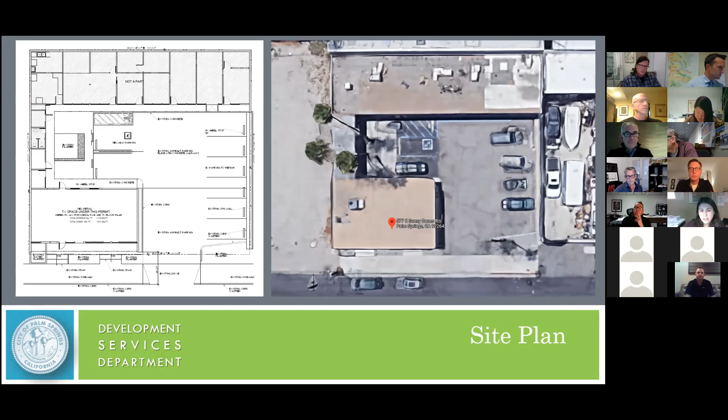There we go. This is a site plan located at 577 East Sunny Dunes Road. The project site consists of 2 main buildings attached by 2 existing restrooms and a storage area on the left. You can see the screen now, right? Yes. Okay, so the image on the right is a Google aerial of the site as it exists currently. You've got a building in the back, and it's connected to the building in the front by some storage on the left. There's a building, a very small building, on the left.

This gives you a better idea of the floor plan. The proposed cannabis dispensary will only occupy the front building, formerly known as Bones and Scones. The retail aspect is approximately 800 square feet. The office is 92 square feet and the storage facility is 123 square feet, with an additional storage area and restroom located outside of the main building.

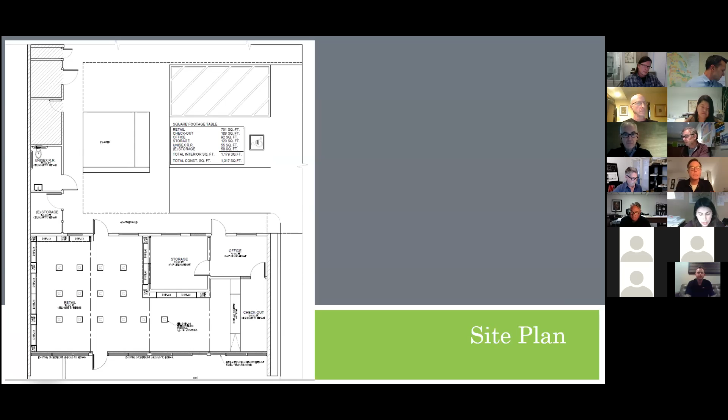The front of the building faces East Sunny Dunes Road. The applicant is proposing to repaint both the buildings in the front and the rear a light beige color. The existing landscaping areas that are filled with sand and rock and dead vegetation currently will be replaced with a nice desert landscape. The applicant is also planning to plant 3 Palo Verde trees in the parking lot along the western property line, which will provide shade to patrons of the development.

The existing mosaic panels on the west elevation of the building will be cleaned and restored. All mismatched doors, screens, and windows will be replaced, and all exterior wall-mounted AC units will be removed and replaced with original clerestory glass. All the debris in the parking lot will also be cleaned as well.

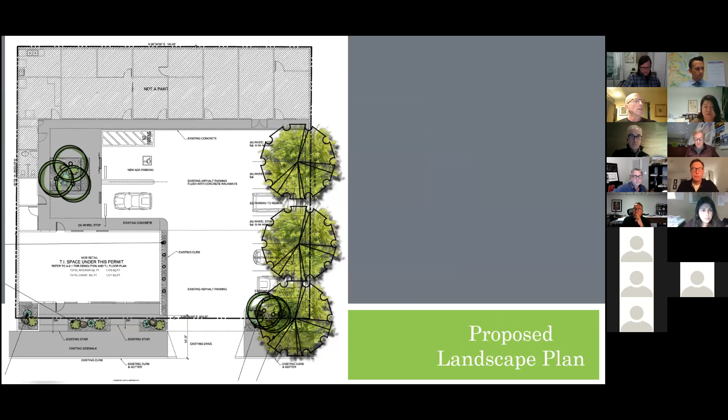So the cans that exist, are they staying or are you replacing them? The ones in the overhang, yes, those stay. They were part of the original design. We're going to restore them and get them to work again.

Okay, that's all I had. Thank you.

Jim, I have a question. In the front along Sunny Dunes, will ADA require a ramp so that you can get from those front doors to the sidewalk without using the stairs?

They did not require that, and it's not a real feasible thing. The building's only 25 feet wide, and that ramp would be, with the 5 feet of landing at both ends, at least 30 feet long, so it'd be longer than the building. The ramp would have to start in the driveway area.

So we are providing access from the ADA space in the back to the door, and that's all level. Technically, to get access from a public way, we would have to have access along the driveway, along the west end of the building and around the corner and into the door. That's the only way to get in and out of the building from an ADA standpoint.

That ramp would also be out in the right of way. The property line is at the edge of the step there.

I'm not saying that I want it, but I do know that on another dispensary we just reviewed on North Palm Canyon, after the fact, they had to come in and install a ramp to get from the sidewalk to the entry door of this dispensary. That's the one in the building where Mark used to be.

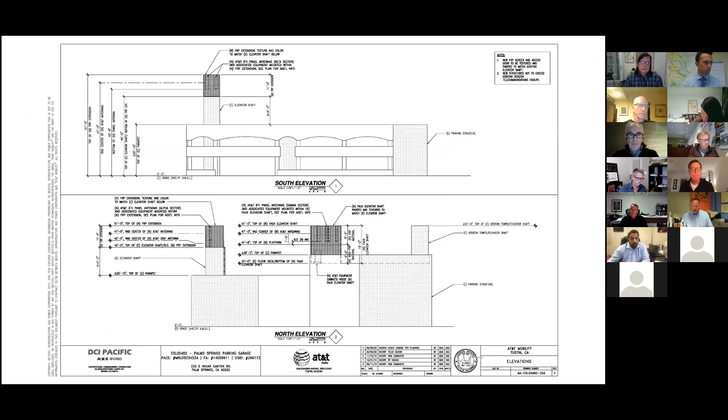Are the tops of these new extensions open to the elements, or do they have an enclosure on them? No, they're closed and fully enclosed, they have a roof. So we don't see any additional scuppers and drains for that, the existing portions have them.

You mean like a downspout for rain? Yes. They would have to describe that. I'm not sure. Okay.

Glenn, do you know with the existing elevator shafts, is there a parapet and the roof is lower than that, or is the roof right at the top, at 14 feet 2? My understanding is there's no parapet, that the roof is the top of the shaft, and it's a hydraulic elevator inside.

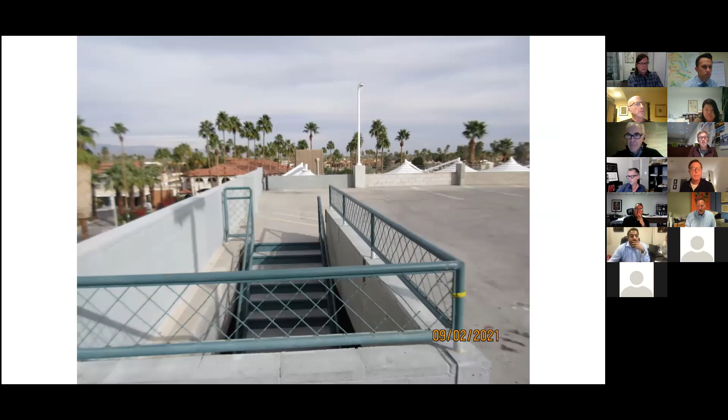One more question. Does the existing Verizon tower have a permanent ladder attached to the exterior? Let's see, I don't seem to, no, you access it from a door at the bottom of the shaft. I don't have a picture of it. Is that what you're asking, how to get into it?

Right, I see a proposed permanent ladder attached to the AT&T ones. Does Verizon have a permanent one? No, Verizon, you go inside. Okay, let me see here. Yeah, there's a ladder here on this side. Okay, thank you.

Mr. Chairman, I have a question of staff. John, yes. Glenn, you did a good job on the math, but I still got kind of lost on some of it. So staff recommendation is to 46 feet, is that correct? Yes, if we can get it lower. Most cell towers we have approved are in the 45 to 48 foot range.

Okay, and what we're seeing, for instance the northeast tower, you've got one really good shot of it. I'm looking at 51 feet, correct? Yes, that's what they're proposing. Okay, all right, thank you.

But the question is, is that still at 46 disproportionate to the rest of the garage? Oh, I think we will have much to say about that. Okay, all right, stand by. Okay, any other questions of staff?

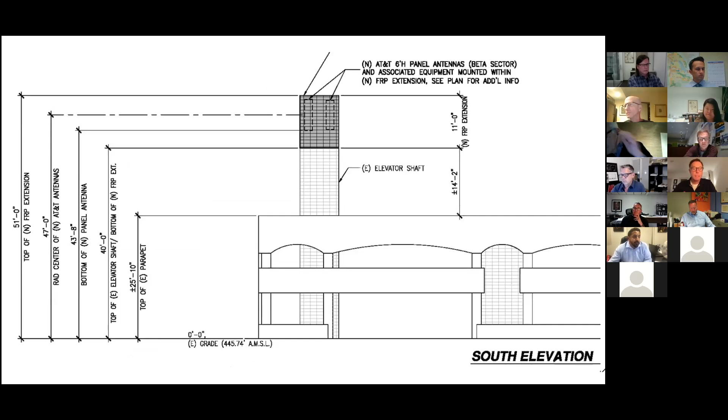To the south, we have a large shopping mall with tenants such as Rite Aid, Chase Bank, and various banks. To the west is an area we're really trying to focus on, the Palm Springs Tennis Club. I know the heights are of concern, and that's simply because of the topography in this area. We're trying to service an area that is kind of secluded around a mountainous range to the west.

The building directly across the street to the east is a 3-story apartment or motel building, and that is really the issue causing problems with our line of sight for antenna coverage, limiting the coverage we're trying to seek beyond that building. Throughout this downtown area, there are various palm trees that line each street in every direction, which also hinders projecting our signal beyond that distance.

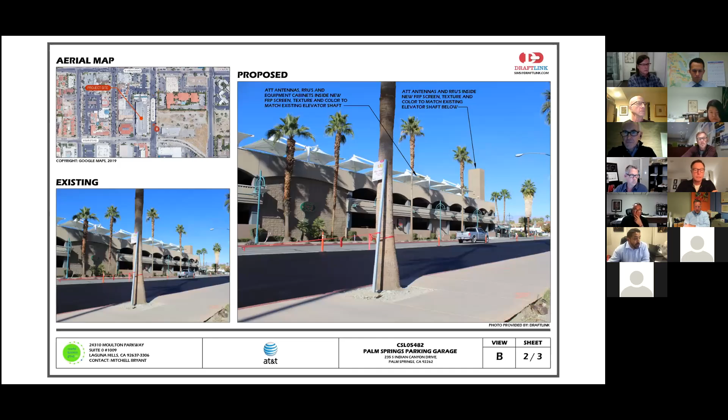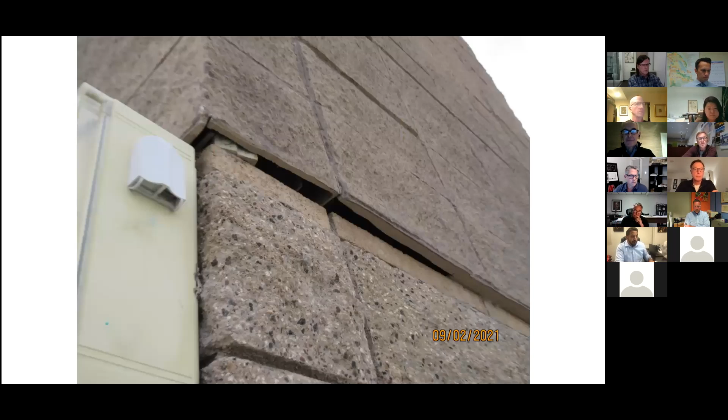This project has been ongoing for a little over a year now, and our initial submittal consisted of a 53-foot FRP extension. Upon our initial planning comments, we were asked to drop it down to 51 feet to match the existing Verizon facility that's at the same location.

So we are seeking your approval to move forward with our project to match what Verizon has successfully completed at this location, and their data does show that the coverage they were seeking has been achieved. So we are looking to do the same and mimic their previously approved architectural schematics, with a little variation based off the areas left for us to use on that parking structure.

This is after vetting out various sites. This was known to be the best location, away from residential areas, that would provide the best outcome.

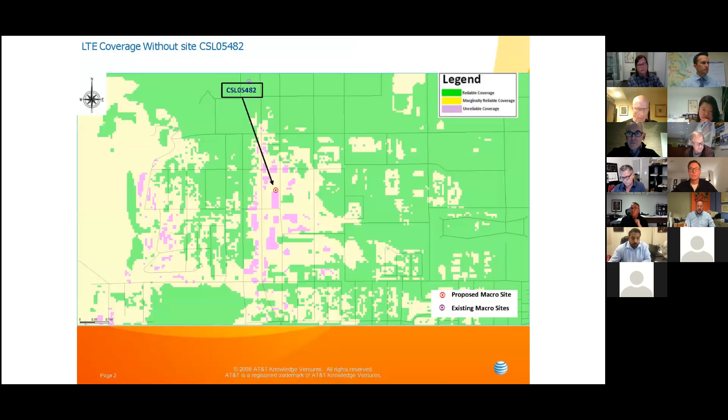The coverage is needed - I'm going to ask some layperson questions, so bear with me. The deficiency is expressed in the form of dropped phone calls in this area, slow data rates, and complaints to the carriers, is that correct? Because one of my first responses was - and this may be totally unique, maybe I have better coverage or something - but I have never lost a call anywhere in that area we're looking at. It's just kind of interesting.

Can you go back to your first comment - was that apparently one of the real causations of this is an apartment building across the street, or the multi-story hotel? It's the Best Western Plus, Las Brisas. Okay, 3-story. All right, huh, okay.

If you put something on that roof - I'm just asking this for general understanding purposes - would that fix everything? Well, the aesthetics we would have to discuss with our engineering team, but the nature and style of that roof would require a larger structure to conceal our antennas because of the various slopes on that building. And I believe my predecessor did approach Best Western and they were not interested.

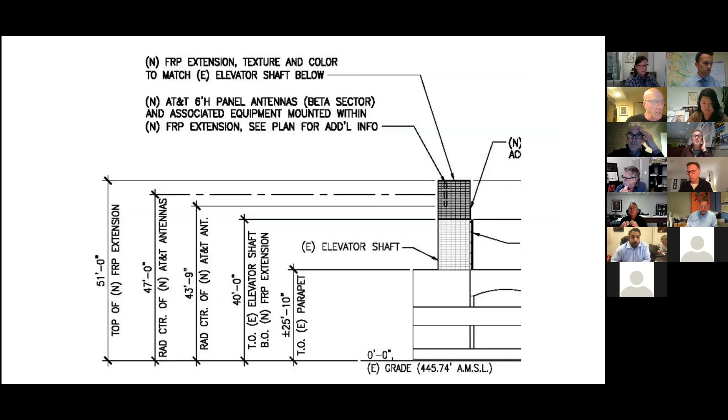Is that right? Correct. And do you know, it looks like there's some sort of brackets that these antennas are mounted on. Do you know about where they are in terms of the heights on the antennas? Are they at the bottom, middle, top? Are there multiple brackets? Multiple. It's top, bottom, and then there's cross bracing.

That's all going to be determined based off of our engineering calculations once we get to the building and safety submittal stage. But typically it does involve top and bottom for stability and for the new structural code that's governing the wind load in this area. It would require the additional bracing.

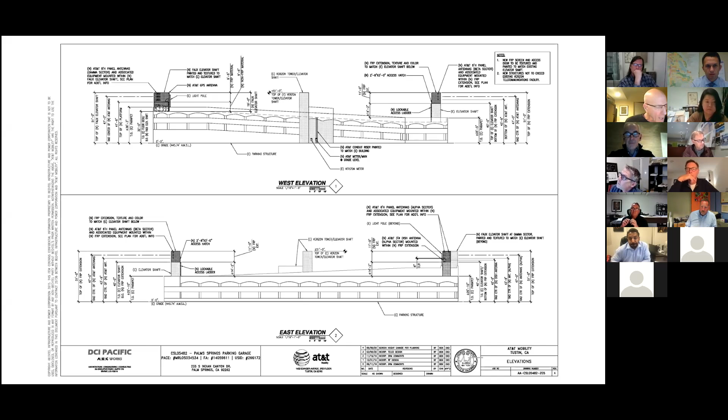Okay. And with the equipment room, you've got a 9'6" ceiling height, and it looks like at least part of it is an open grate. Am I reading this correctly? Typically the equipment platforms for this type of a build is an open grate, just to keep the airflow moving through there as well, to not enclose it.

And is there some reason you need 9'6" height in the equipment area? For ventilation, the cubic feet, how it's measured, but also the cabinets, the cabinet heights would limit that open space, and for somebody to safely crawl in there and access the cabinets and walk around that general area.

Okay. Let me just see. And also to mention, I think that for the installation of the equipment as well, anything lower than that would be hard to slide in the equipment during maintenance phases and the installation process of it.

But aren't you bringing the equipment in through the door, or are you craning it in from the top? It would be a combination. It may require crane. I'd have to consult our engineers, but based off of the way that the cabinets are constructed, usually when they're roof mounted equipment, they do hoist them up.

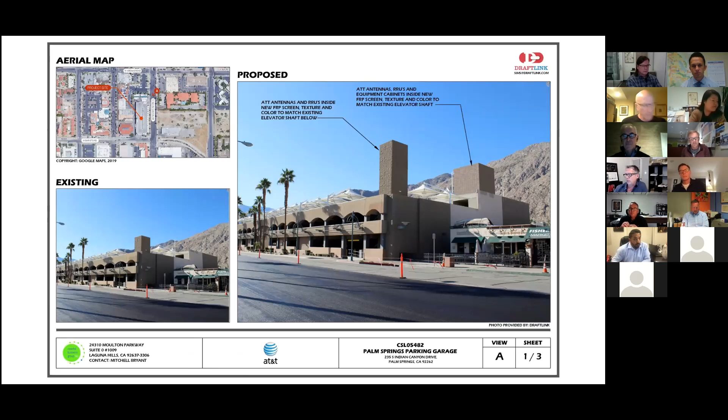Is, John, yeah, is there some area in the center of the building where these could be located? Do they have to be on the corner of the building? Well, our design intent was to not reduce the number of parking stalls and in essence reinvent the project.

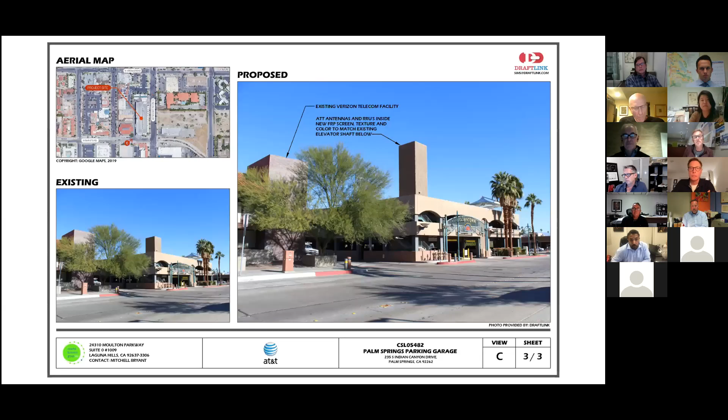So we're looking to keep the aesthetics as much as possible to the existing building, and just to add on to it. But yeah, that would be the least intrusive method for this parking structure, and it would be a little bit more of an engineering feat to place something right in the center, because there is an opening on the way that parking structure works, and the post tension nature of that building would make it a little more difficult to work with, and could cause potential issues with the structural capabilities of that current structure.

I have a question. Sure, Tom. The type of equipment that's being used here, is it similar to what you might see on like a monopalm or some of the other installations? Or is there something different about this, other than the enclosure it's being placed in?

We use the same equipment for various site types. In essence, it's supposed to be the same equipment that you would find on a traditional monopole. Usually monopines or monopalms are restrictive as far as how much equipment can be placed on there because of the concealment issues. But this proposal was based off of concealing the site completely to not make the antennas noticeable and stand out.

And is it more or less than what you might find on a traditional setup at each of the locations? This current setup is the same as what you would find on a monopalm. The same amount of antennas and equipment. Okay, great. Thank you.

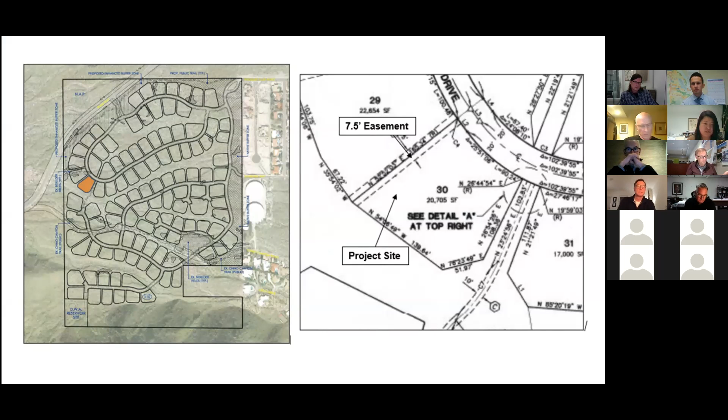Do we have a staff report? Yes, good evening. As introduced, the project you are about to review tonight is a proposed new single-family residence. The project site is located within the Desert Palisades specific plan area, shown on the screen indicated with this orange color, located in the southwest portion of the specific plan area.

The project site is a hillside, and its topography slopes down from its southwest corner towards the northeast corner of the lot. These are the photographic images that applicants submitted, taken from the project site.

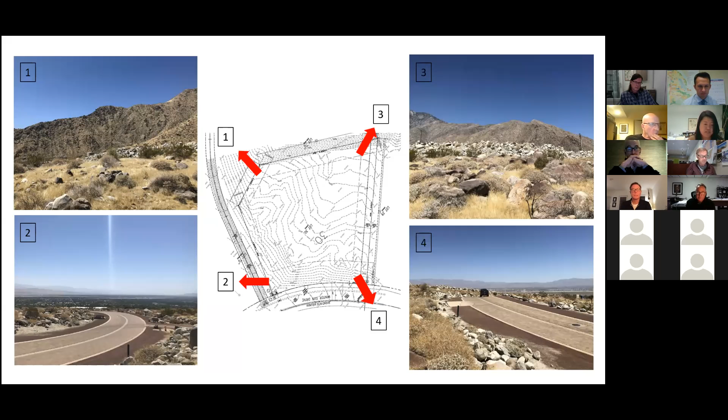As introduced, it's a new single-family residence in the Desert Palisades specific plan area. The size of the residence is 4,276 square feet, and the lot size is 20,705 square feet. The proposed residence is a single story with a maximum building height of 22.2 feet.

Because the site is located within the specific plan area, this project was reviewed in accordance with the specific plan development standards, as well as architectural and landscape design guidelines, in addition to the city's other zoning ordinance regulations, such as hillside developments, architectural review, and environmentally sensitive area specific plan zone regulations.

This is a proposed site plan. As shown, the site is accessible from the driveway, located on Winter Sun Drive, which extends along the west property line towards the rear. The building is L-shaped in orientation, and the proposed residence will accommodate a detached pool cabana as well as an infinity edge pool.

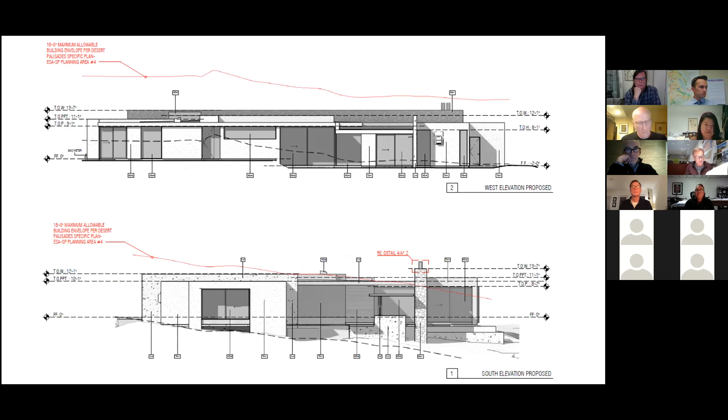These are the elevations of the proposed residence. The applicant provided the red line, an 18-foot line, to show the maximum allowable building height for this particular property. As you see on the top elevation, part of the building will project slightly above the maximum allowable building envelope. These are other elevations, west and south, where again part of the structure projects above the 18-foot allowable building envelope.

The proposed project includes a new landscape, and the proposed plant palette includes acacia, Mexican and Texas ebony, palms, and cacti. The project proposes dispersed plant placement to retain the natural appearance of the site, and the plant palette also includes water efficient landscape planting materials. However, a majority of the materials proposed for this project are not native plant materials listed in the specific plan guidelines.

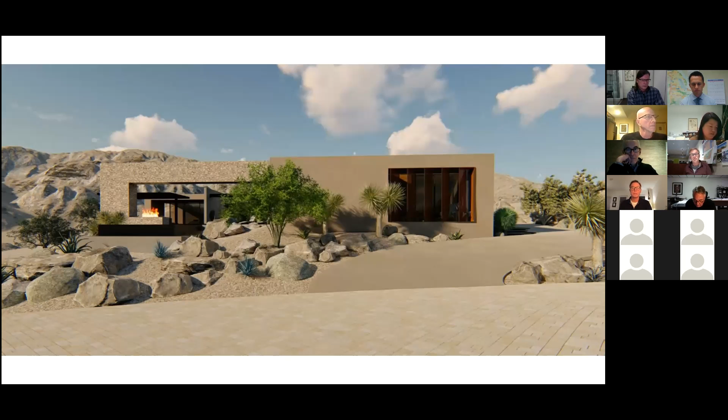This is a primary elevation of the residence, which faces north. As you can see here, the proposed design exhibits a rectangular geometry with very strong horizontal massing.

And the project proposes a mix of vertical and horizontal elements to create an interesting natural rhythm within the building, to differentiate the volumes. As you see here, the applicant is proposing to use unique materials to accentuate the building elevations. And these are the views of the outdoor area.

The project proposes a wooden deck which extends from the primary residence to the detached pool cabana. They're proposing to utilize black onyx coping tiles for the pool, and to use wood as a ceiling material for material consistency and for accentuation of the building.

And these are the images of the rear of the property, the garage elevation, as well as the view that's taken from the side, actually the east side, and the roof overhang, just to show what they're proposing to do.

As you see in the staff report, the applicant provided a material board, and they're proposing to utilize different types of materials for this project. The proposed materials include natural stone, smooth stucco, walnut veneer, board formed concrete, and Corten steel.

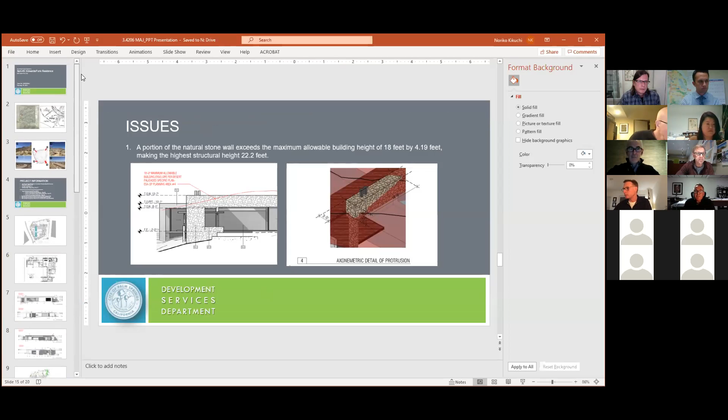Noriko, the limitation of 150 square feet for the pool cabana, is that something in the city regulations, or in the plan district or HOA regulations? This language is actually noted in the development standards as well as the design guidelines of the Desert Palisades specific plan. So you do not find this requirement in the general zoning code section, but it's coming from the specific plan.

And is there a method to approve a larger footprint for the cabana? Based on my research, no, not to increase the area or anything. Thank you.

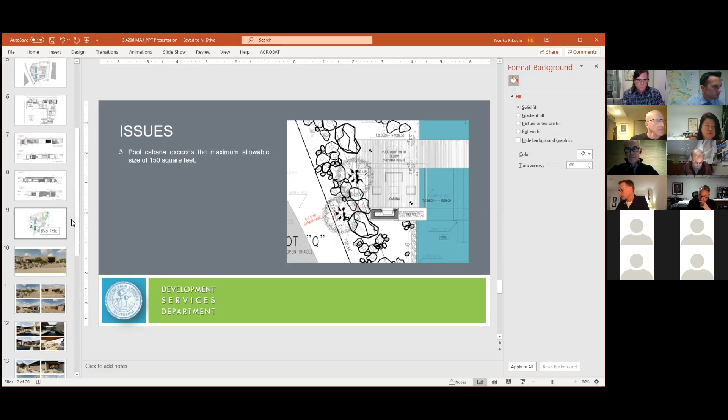Does this go through the development's HOA review? Yes, according to the applicant, the project has been reviewed by the HOA and it has been approved. The applicant is here with us tonight, and he can provide more detailed information. Okay, thank you.

Robert, did I hear you wanting to ask a question? Yeah, I do. So Noriko, when they calculate the size of the cabana, is it the roof area, not the floor area? Correct, it's the covered area. Okay.

And then the other question I have for you, the area where the encroachment of the mechanical room, mechanical space goes into, beyond the property line, that is just open space. There's not another single family property right there. There's some sort of easement. I know there's a sort of a one-lane road that goes up along one side, but then there's an open space easement or something behind that. Is that right?

So yes, this particular lot backs up onto an open space, and the area where the part of the building projects, that's actually facing a trail. So it's not really facing another property or anything in the area. And I think the easement you are referring to is actually on the opposite side, in the west side yard area.

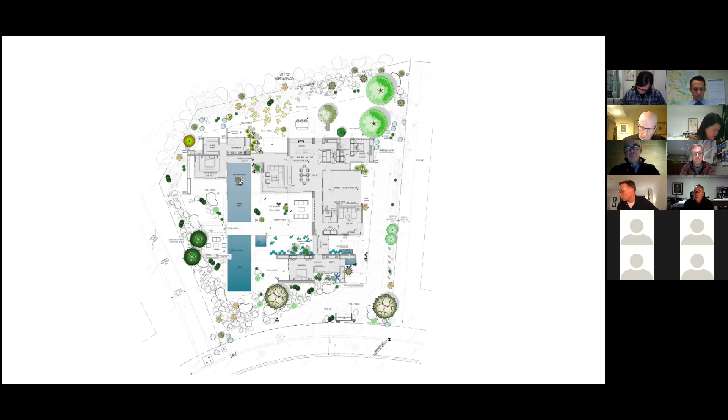Okay, thank you. Any other questions of staff? Okay, would the applicant like to give us a presentation? Give us your name please, and you have 10 minutes.

Hi, I'm Jordan from Studio AR&D Architects. Thanks, Noriko, for presenting the project. We'd like to explain to you what the initial concept for this project was. Due to the nature of the site, with so many beautiful views and undulating topography, the initial concept was to have multiple nodes and pods of the house spread across the site with glass bridges connecting the spaces. As the concept evolved, these nodes ended up getting closer to each other, but we still have defined wings through the site.

One of which became the Cabana, and this stone blade wall connects and ties the structure through the site. So that was the initial concept. There are a few key defining features as well. The biggest one we would consider is the natural stone blade wall that runs from north to south of the project, running through the house. It serves multiple functions, such as built-in vanities in this wall. We've got a water feature at the front entry penetrating this wall. It also serves as a header that goes above the pool, creating an interior space for this yard without framing the view, and also providing a little bit of shelter and shade for the Cabana. It also functions as a chimney at the Cabana for an outdoor fireplace.

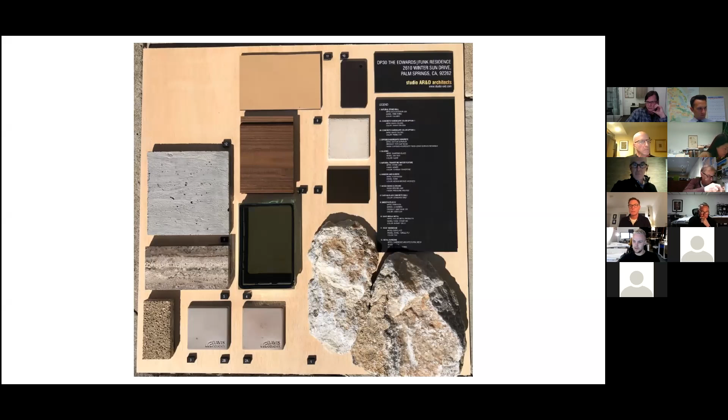So at the Cabana, that blade wall there, where we're exceeding the maximum building height, that's a chimney. I don't know, Noriko, if you could show this view here. Due to the nature of the site with the topography, it was really hard to get this blade wall to conform underneath the 18-foot high maximum allowable envelope throughout the whole site, because the topography in this corner of the site drops about 7 feet. So it was hard for us to make this part of the wall conform, and that is why we've added this diagram showing what part of the wall is penetrating this. Again, that corner is purely an architectural projection and a chimney.

Moving on to the architectural projection at the master bedroom. This area here, we consider it like a bookend to the structure. It defines and grounds the master bedroom, and it provides shade from the western sun to the master bedroom, and it also provides a little bit of privacy from pedestrians on the hiking trail walking down. It blocks their view into the master bedroom a little bit, and we just think it ties the structure together.

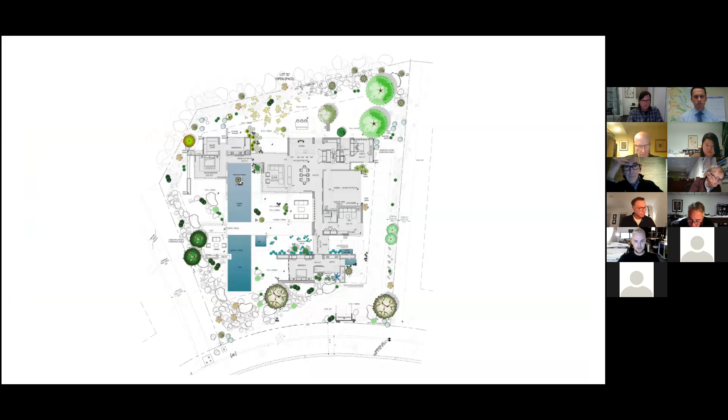That's about it. The pool is probably one of the other big design elements of this. It runs east-west through the yard, and it also, as well as the blade wall - if you could show the interior renderings of the yard. Yeah, these ones here.

Yeah, that's about it from me.

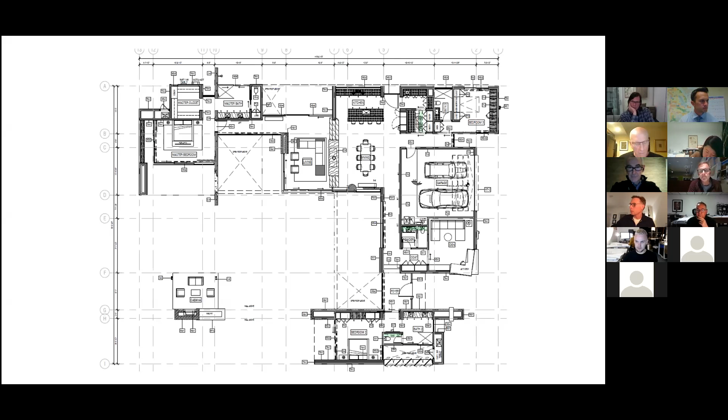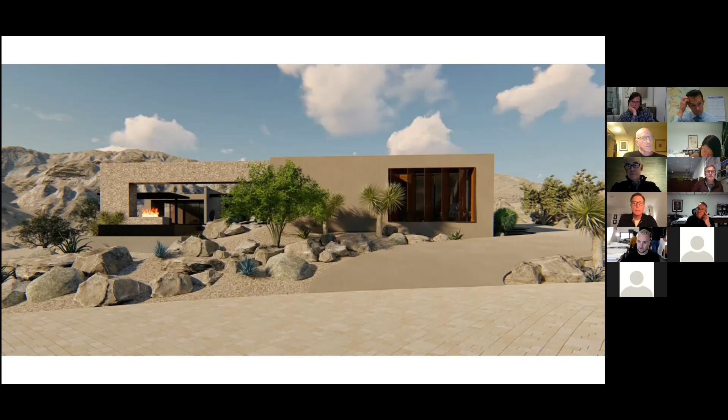Okay, and at the bottom of the drawing here at bath number 2, in that courtyard between the bath and the street, it looks like there are operable louvered doors, and I couldn't see on the elevations what the material is. I'm also wondering how those louvers operate. Yeah, those are going to be a woven corten steel louver, which are in the renderings—Norika, could you show those? So they're a woven steel mesh with a rusted patina finish, and they're operable from inside the house so the client can tilt them based on sun and privacy.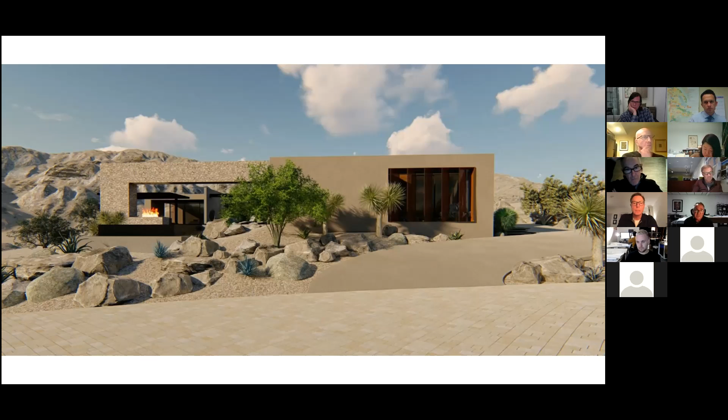Okay, and up on the roof you have a big mechanical chase that goes from the mechanical room at the garage, across the garage, and down the length of the house. Can you describe what that is built from? Are the sides of it plaster? I know your roof is a membrane—is a membrane on top of that mechanical chase? How does that work? Just as a quick backstory, we've been preparing for a building submittal. We were going through our Title 24, and we've actually reduced that doghouse HVAC component over the garage, so we only have a small section of it now, and it will be covered in that single-ply roof membrane on all sides. So if I'm seeing that from off the property, I'm seeing the membrane roofing on the vertical surface? Yeah, which is a light tan color.

Okay, and regarding the cabana, I don't know if you might have an argument about the size of it by saying it's not detached from the rest of the house because it's attached to your blade wall, so it's part of the overall structure of the house. Just a comment there. An argument. Yeah.

Okay, other committee members, questions for the applicant?

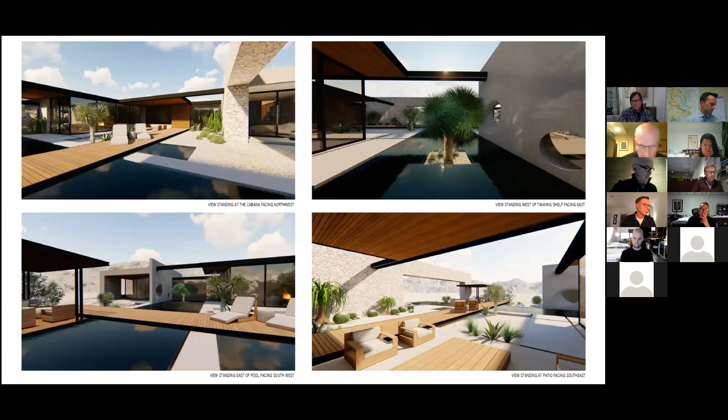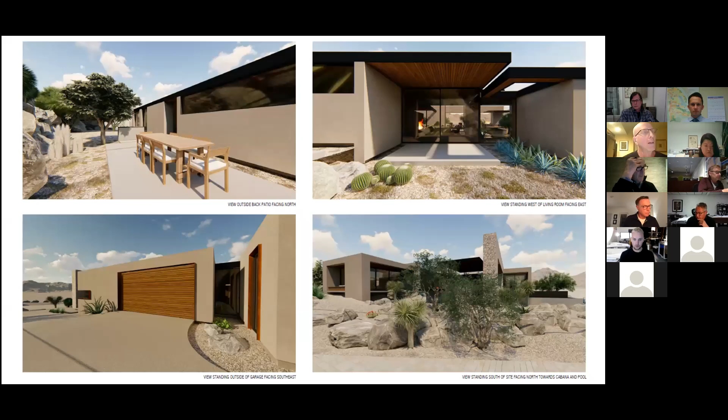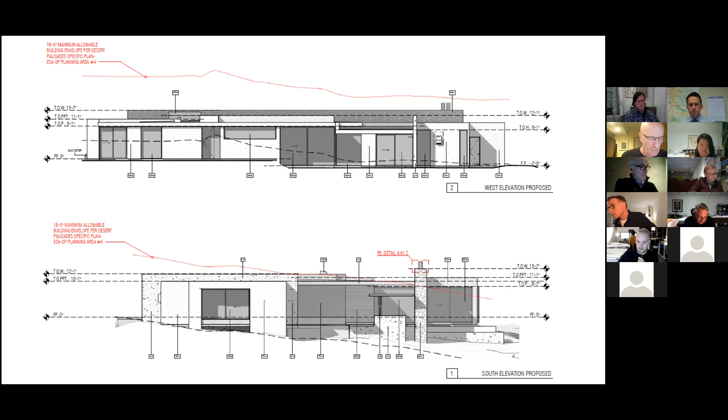I have just a quick question—so outside the master bedroom, where the mechanical room, or it's not really a room now, extends into the side yard. It looks like from your drawings there's that elevation, to the left of the master bedroom. Let me just see which drawing—it looks like it's drawn in wood. If you look at the enlarged plan, it's got a material of wood on it. What is that? Is that a bench? Yes, it's a 1'6" high wooden bench that's kind of curved as well. The goal of that is also because the trail is about 12 feet below this—it's to provide a little privacy to clients who might be in bed looking up from that trail. They won't see the bed and furniture if their curtains are open. So it's a dual purpose.

Robert, anything else? No, no, okay, thank you. Dan, did you have any comments? No, I'm good, thank you. Okay, John Walsh?

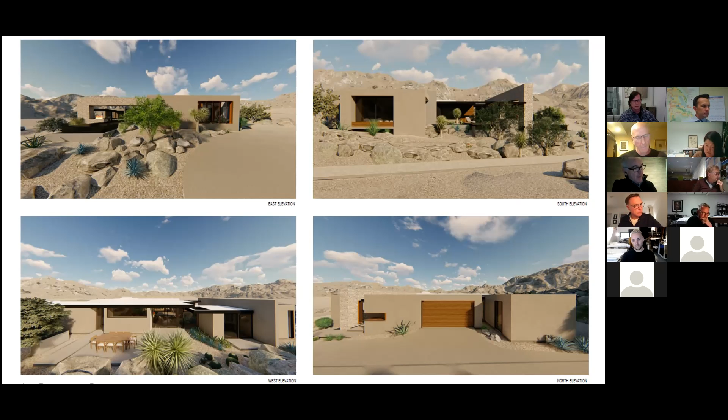I think I'm all right, but maybe I need refreshment. As I look at the staff recommendations, the 8 of them, what has dropped out? Number 1, the height, perhaps? Right, okay, and that's it. Is that right? So all the other staff recommendations, 2 through 8, still stand?

Yes. Okay, so out of those, number 2 and number 3 really pertain to the building envelope, and the rest are pretty much detail issues to be worked out. Okay, that's fine, I just needed to understand that.

Okay, thank you. No more questions for the applicant? Jordan, thank you. Did they also drop off number 5? No. Robert, excuse me, didn't they also drop off number 5, which is the floodlight? Yes, they've already done that, yeah.

Okay, while we're looking at the list, number 8, you've been presented with this, do you have any thoughts on how you're going to address number 8, increasing the native plants in the palette or reducing the number of non-native? Yeah, so what we've done with the landscape is we used mostly native plants around the public right of way, and we did use some more ornamental plants in the private spaces, those of which we can supplement with native plants to comply.

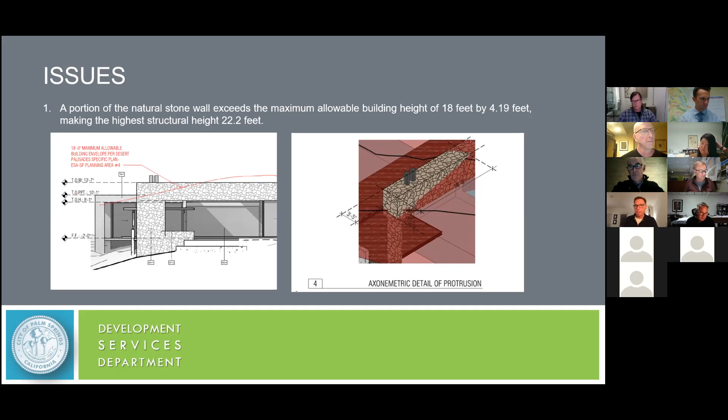I think we have a motion and a second. All in favor? Aye. Aye. Any opposed? Thank you. Great project, guys.

Okay. Number 4. Mike Flannery for a sign program application for Flannery Exchange, a multi-tenant commercial building located at 750 North Palm Canyon Drive, Zone C1, Section 10. Could we have a staff report, please?

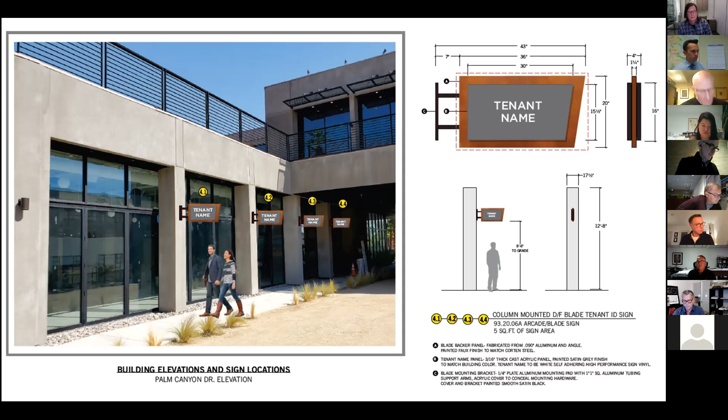The construction will include a painted aluminum bracket, which is going to be attached to the aluminum sign backing, painted to mimic corten steel, and an acrylic sign panel affixed to the metal backing, with tenant name in vinyl lettering. This just shows the installation location of the blade signs.

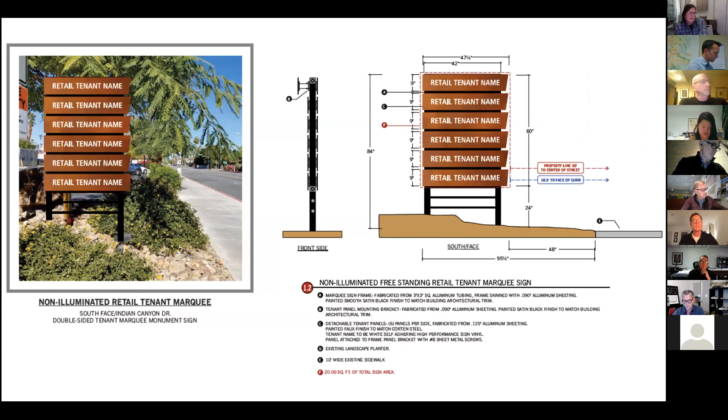For the North Indian Canyon Drive frontage, the applicant is proposing an additional freestanding sign, which will accommodate the tenant names. For the building elevations, there are 3 wall signs proposed. These are the installation locations of the proposed signs.

Based on what's submitted and staff's observation, this application proposes the installation of 13 signs, and the amount of signage proposed exceeds the quantity found on other similar multi-tenant properties in the Uptown area on North Palm Canyon Drive. The proposal also includes a freestanding sign that does not really display the building name. Based on the language in the zoning code, freestanding signs are primarily intended to display building names, with tenant names being secondary. So there's a question of whether this application meets the intent of the zoning code.

Also, based on the site plan included in the program, the freestanding signs will project into the right of way. Staff also finds that one of the proposed wall signs on the North Palm Canyon elevation appears architecturally incompatible. The sign program also includes signage that is not really consistent with the intent of the zoning code.

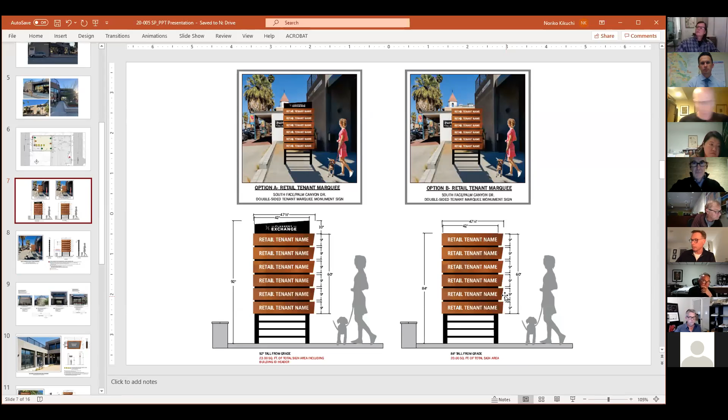Anybody else have a question for staff? Yeah, I have a question. Noriko, on the monument signs on both Palm Canyon and Indian that are being proposed, you say they project into the public right of way. So what is the setback in the commercial district? Because based on their diagram, it shows it's behind the property line. So on commercial properties, are you not allowed to have signs on the property line?

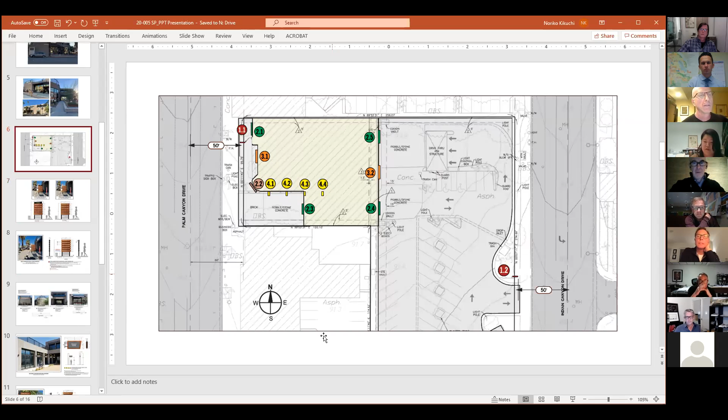Well, this property is very unique. It's difficult to see, but this property includes what's called Lot A and Lot B. It's a strip of land only 5 feet in width, located on both Palm Canyon Drive and Indian Canyon Drive. If you look at this diagram, let me enlarge it. Sign 1.1 on the North Palm Canyon Drive frontage is actually in the area that's been dedicated to the city. So even though it's behind the decorative block wall, that area actually belongs to the city, at least a portion of it.

For the Indian Canyon Drive frontage, the sign slightly projects into the public right of way as well. I understand it's sometimes difficult to prepare a precise drawing when there are dedications and many elements involved, and the applicant can clarify exactly where it's going. But based on what's shown here on the site plan, both signs project into the public right of way. Okay, thank you for that clarification.

Any other questions of staff? Oh, I'm sorry, I missed one. In your analysis on sign 3.1, which is a building ID sign located over the entrance on Palm Canyon, you say the intent is to identify the building name, and that does not conform. Can you explain that? Yes, according to the zoning code, each business is allowed to have one main sign on the facade. In this case, what they're trying to display is the name of the building, not the business, which is why staff mentioned it's inconsistent with the intent. Okay, great, thank you.

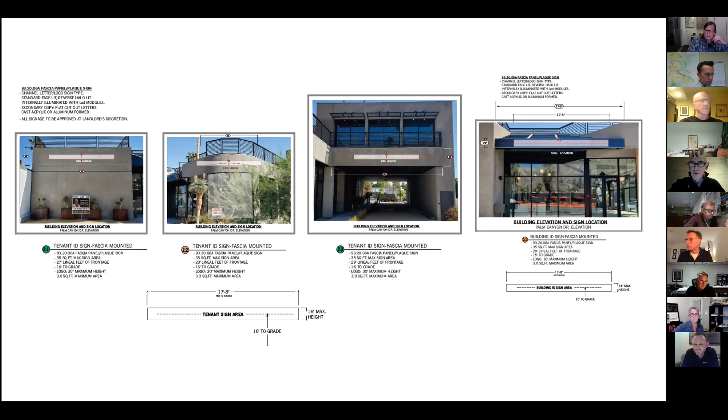Thank you. Okay, the tenant sign and then the tenant name of building sign where we had the lady walking her beagle side by side, can we go back there? Okay, if I understand this correctly, there's a choice that you're given, you can't have both the building identified as well as the individual tenants, right? Well, my understanding, and Noriko can correct me, is that staff would prefer to have the logo on there and does not want just a freestanding sign with just tenant panels.

Which I would agree with. Yes, but I think the issue is that we were trying to get an extra 3 square feet there because it's restricted to 20 square feet including the logo, which I think will make those panels maybe too small. Possibly it could work on this side of the property, but on the other side, I don't know if having those small tenant panels, because you're talking about a 9-inch panel, typically that would give you half the size of the lettering. So you're talking about a 4-inch letter for a business name as people drive by in Indian, may not work.

I'm sorry, I'm just kind of still confused, so these are just 2 options that you are okay with either one of them, option A and option B, and the city will accept both?

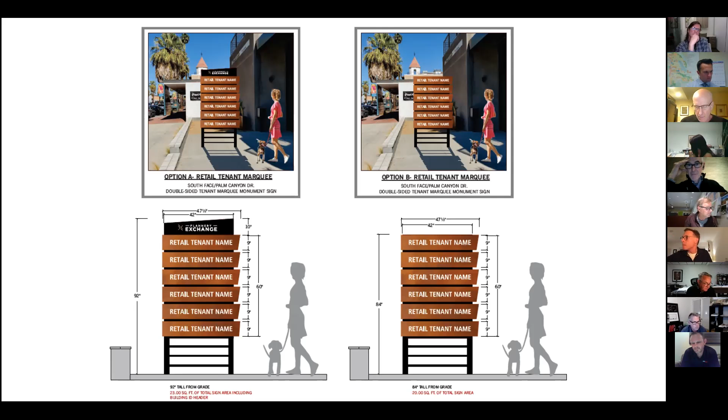The second floor could be handled through a directory. Yeah, because there are 6 yellow spaces on the first floor, which I assume is how they came up with the 6 tenant signs. Well, there's 6 plus, I'm assuming, plus the restaurant. Oh, you're correct, yep, so the restaurant has no billing, if there are 6 retail businesses there.

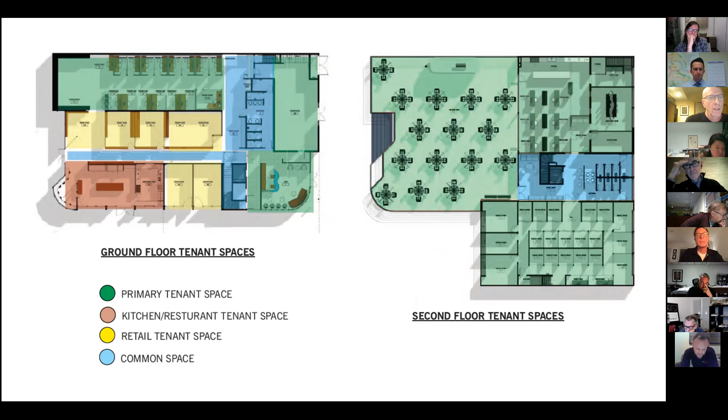Right now it's all behind their window, and I don't know how code enforcement or anybody approaches that. The restaurant has an allowance at 2.2, which is a building sign, that's on the curved wall.

Maybe the other way would be to allow the building signage and just a marker for the name of the building, rather than having the monument signs look like a directory. They look like a directory to the property.

Well, they are a directory, but I think if by permitting that we can get rid of the 4 large green signs and the 2 large orange signs on the building, it would certainly clean up the building, and it lets everybody have their name in the public domain somewhere.

But I think John's problem is that there's not enough signage space on those monument signs to allow for all the tenants. Well, he mentioned that only the tenants on the first floor would have signs. I believe - I'm not putting words in your mouth, John.

I would have to have a conversation with the owner, but I can almost guarantee, because there were options provided by the city, it was either/or - either remove the freestanding and keep the building signage, or keep the freestanding and get rid of the building signage.

I would imagine the tenants who occupy the work share spaces would have much more priority to signage, that the owner would want to give them an allowance over seasonal retail pop-ups on the first floor. So if it came down to a choice between freestanding signs or building signage, I would think it would be building signage, but I need to have that conversation. Again, the building signage is very important for the tenants upstairs to identify them, and those freestanding signs were purely just for retail first floor locations.

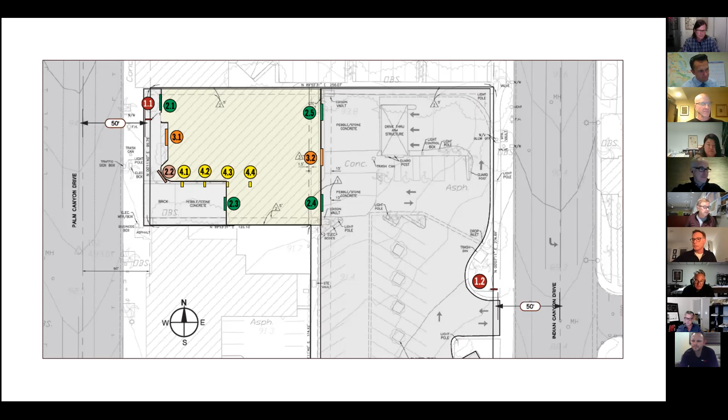Okay, thank you to the committee for getting through our agenda. Do we have any committee member comments on just things in general?

Oh, I have a comment. Remember the project that we did on Monte Vista, and they had the big white monolith things? Weren't they supposed to leave the vegetation that was there? Because I went by earlier this week and everything's gone. All that ficus is cut down to the ground, the wall's gone, everything's been torn down.

Which project was this? Is this the gated community? Las Palmas. They had those 3 big white, 14-foot tall monoliths that were put into the landscaping. I thought the landscaping was supposed to stay and they were adding some elements to it, but everything's gone. All the trees are gone, the wall's gone, everything's gone.

Uh-oh, yeah, I'll have to look into that. Member Thompson, we did approve that project. It wasn't as originally or previously shown to you, but I don't recall us approving the removal of all the trees and landscape though. So we can look into that and get back to the committee on that. Yeah, we might need to have them come to us with a landscape submittal.

Any other comments? Staff, any comments? Okay, I think we're adjourned. No, Mr. Chair, I think Director Fagg has some comments for the committee.